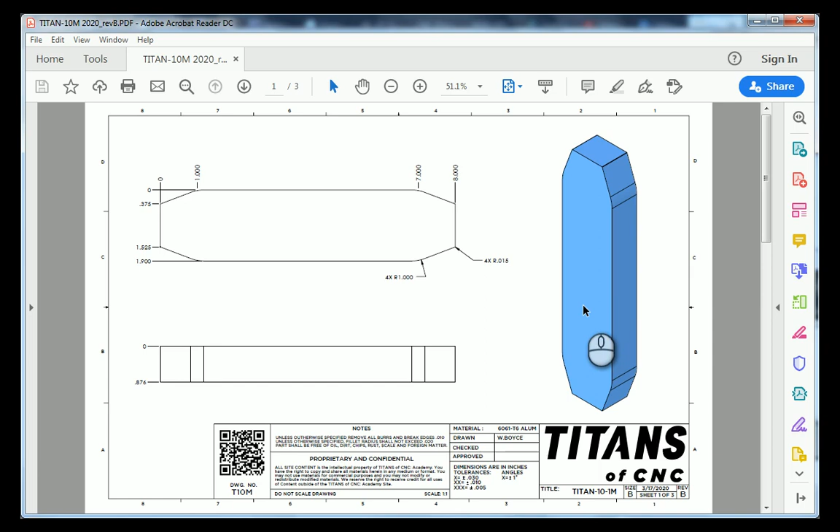On sheet number 1, we have the outside geometry of our part, and we also have some radii. Sheet number 2, we've got these bosses and their locations. Sheet number 3, we've got these counterbore holes, tapped holes, and polygons, which make up the features of our honeycombs.

Looking at our front view here, we have a cutaway, and we are ready to go. Let's jump into Fusion 360 and create our drawing.

I'm over here in Fusion 360 now, and I already have the Titan 10M loaded. The very first thing that we need to do is create some reference geometry that we can import into our drawing workspace.

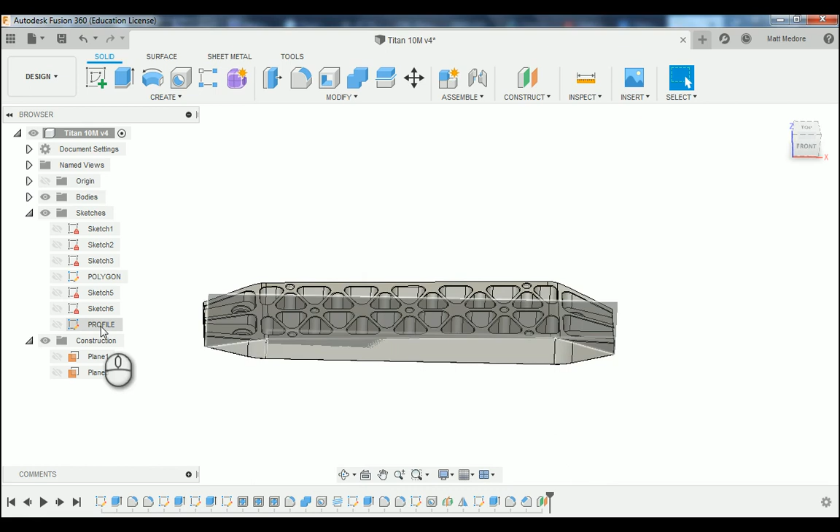As you can see in my sketches, I've changed some of the names so I can better find them. The two sketches we are going to be looking for are the profile sketch that cuts our part away, and our polygon sketch, which creates that honeycomb feature.

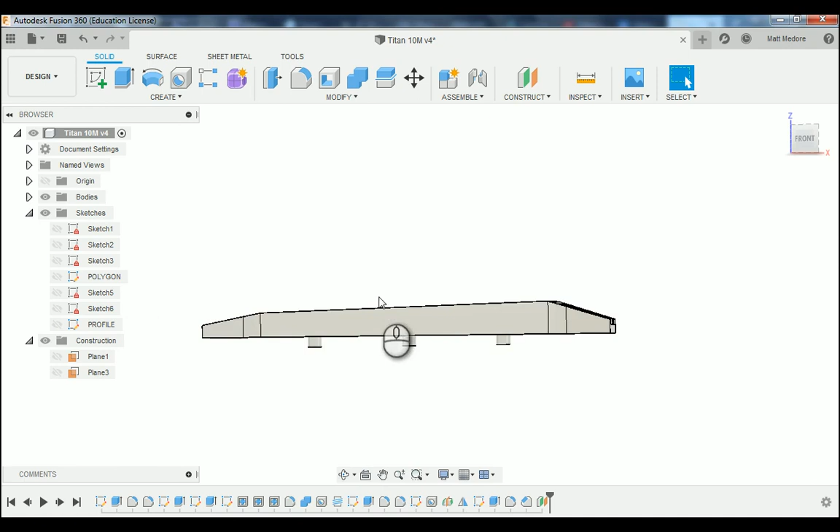We're going to create two new sketches though, because I don't want all that geometry, just a portion of it. So I'm going to go to Create and down to Create Sketch, and click on the front part here.

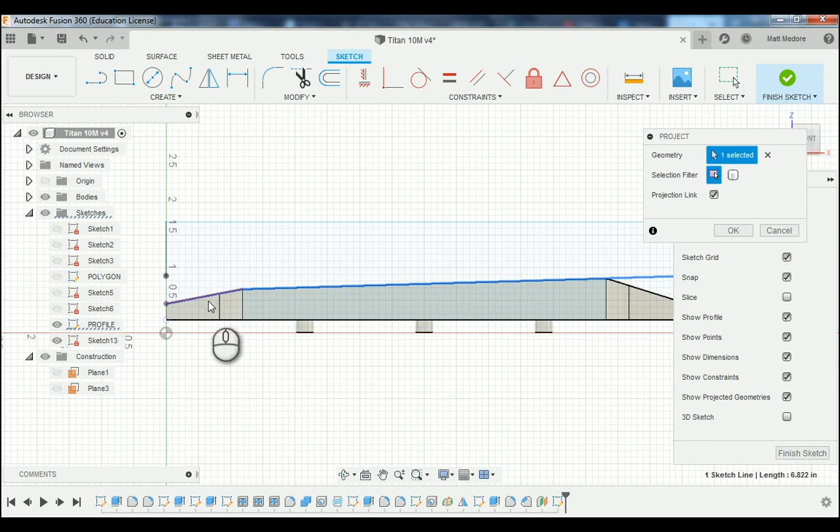I'm going to come over to my sketches and turn on my profile sketch, and I'm going to project, so P on the keyboard, some geometry. The geometry I'm going to project is this line right here, and this vertical line, and then press OK.

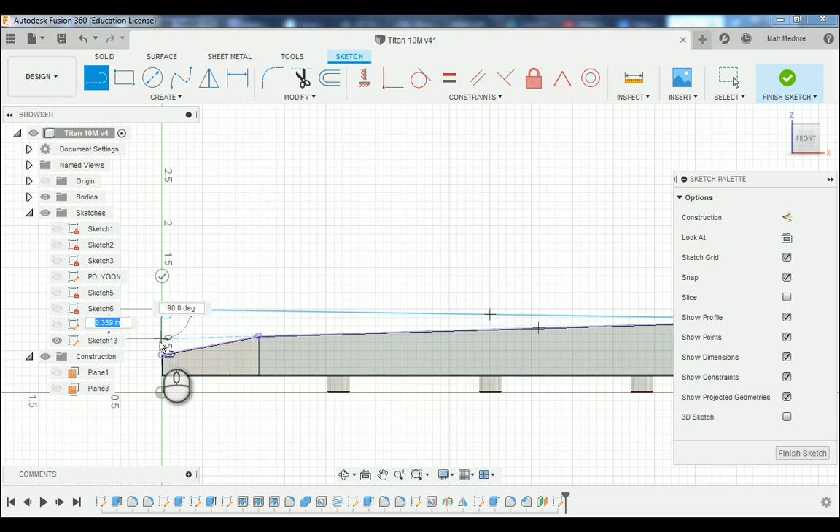Once you have that geometry in place, we're going to turn off our profile sketch. What we're going to do is create some new lines in here, L on the keyboard. We're going to draw a line in. This line, we want it to go all the way across the part, and then terminate into this endpoint.

We want to add a relationship to this line. We want to say it's perfectly horizontal, so we're going to add in that horizontal constraint, just like that.

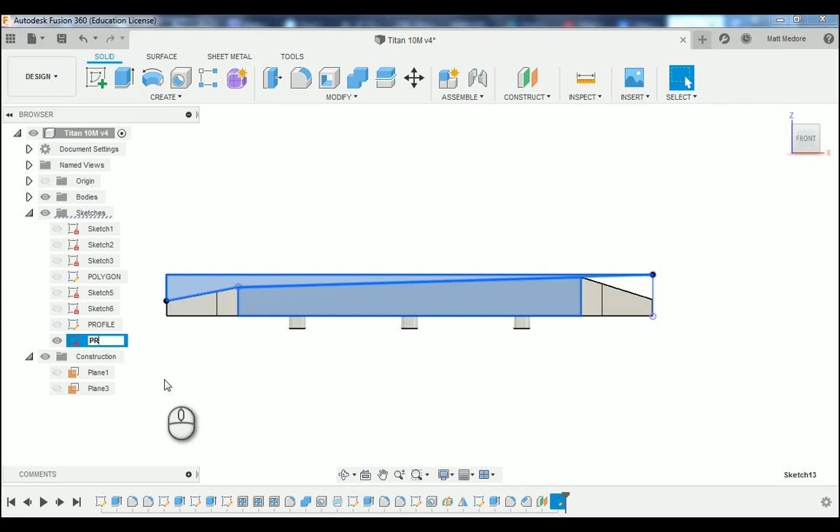We're going to finish our sketch here. Then I'm going to rename this sketch by slowly double clicking on sketch 13, and I'm going to label this as profile drawing, then enter to lock it in. I'm going to turn the visibility of it off so I can work on my next sketch.

My next sketch, I'm going to have to create a construction plane on because the top of our part here is cut away at an angle. So I'm going to go to Construct, down to Offset Plane.

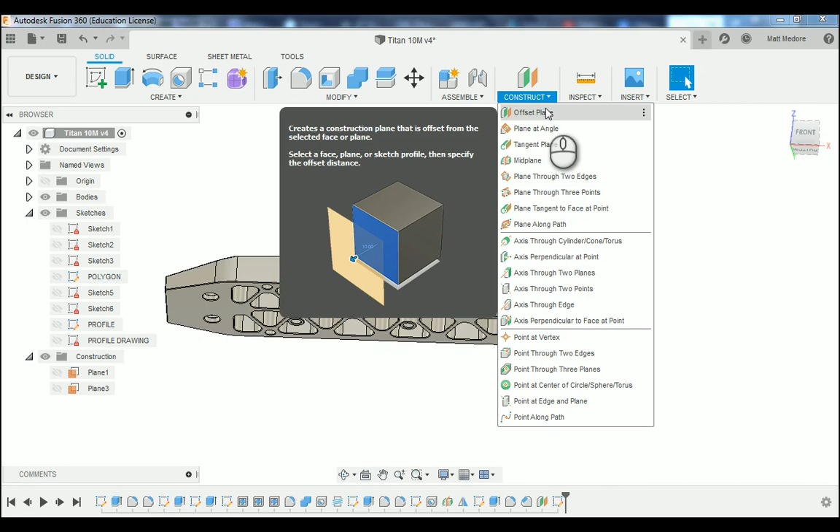I'm going to click on the very bottom of my bosses, and then I'm going to type in a measurement of -876 thousandths, which is the top of our part, and then press Enter.

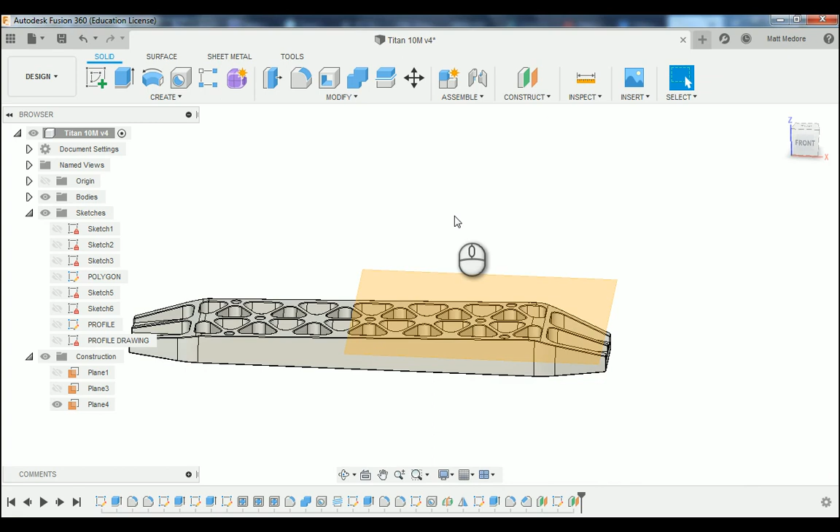Now that I have a construction plane here, I can create a new sketch. So P on the keyboard for project. We're going to click on this sketch here, and then we're going to turn our polygon sketches on.

The geometry I'm after in this sketch is going to be the geometry that makes up this polygon, including the cross lines. So I'm just clicking on those lines here, but I'm not clicking on the center line because that center line goes all the way through the part. Notice if I turn my body off, this is the geometry I have chosen.

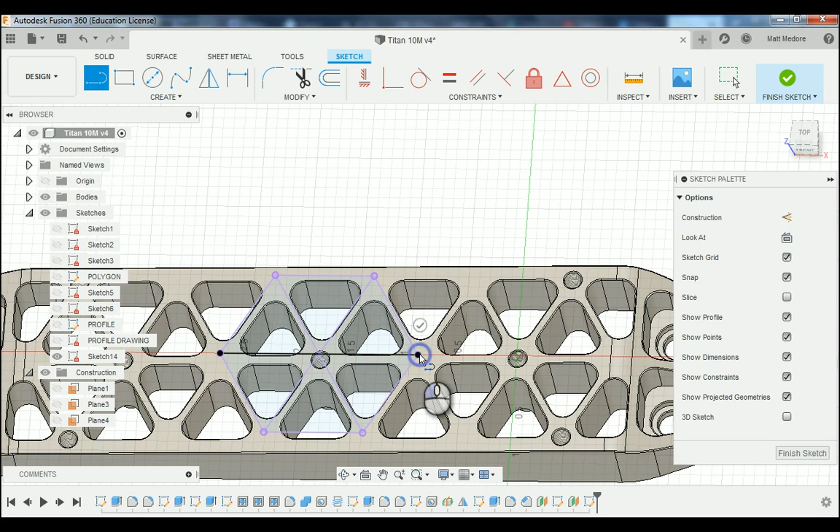Afterwards, I'm going to press OK in the pop-up window, and then I'm going to turn off my polygon sketch. I'm going to add in that missing center line and finish my sketch.

I'm going to label this sketch as polygon drawing. That way I can reference it in our drawing workspace.

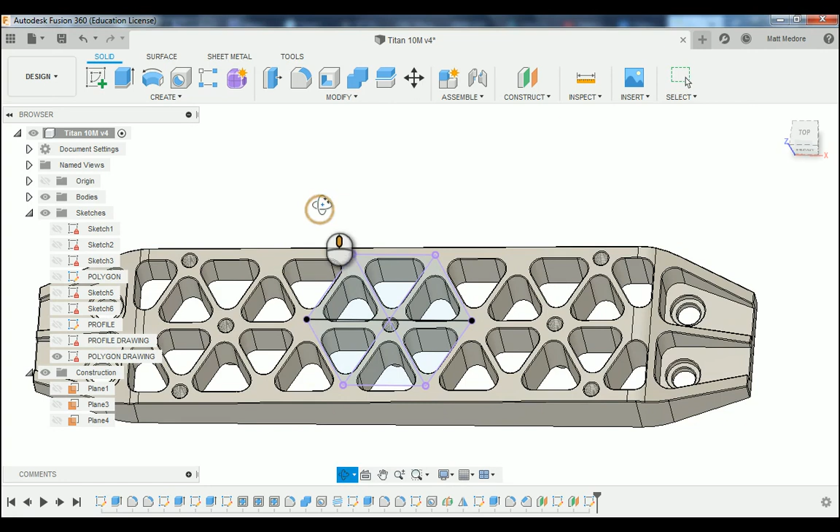We're ready to move into our drawing workspace. First thing you have to do is save your part, and then we're ready to change our workspace, going down to drawing from design.

In our pop-up window, it's asking, do you want everything in the modeling workspace to be a part of your drawing? Yes, we do. We are creating a new drawing. The template that we're going to be using is a template that we created in another video, and then we're going to press OK.

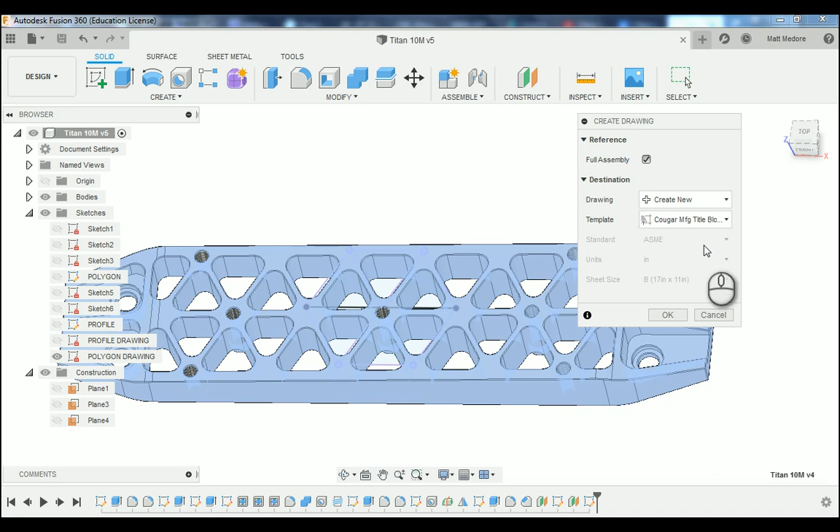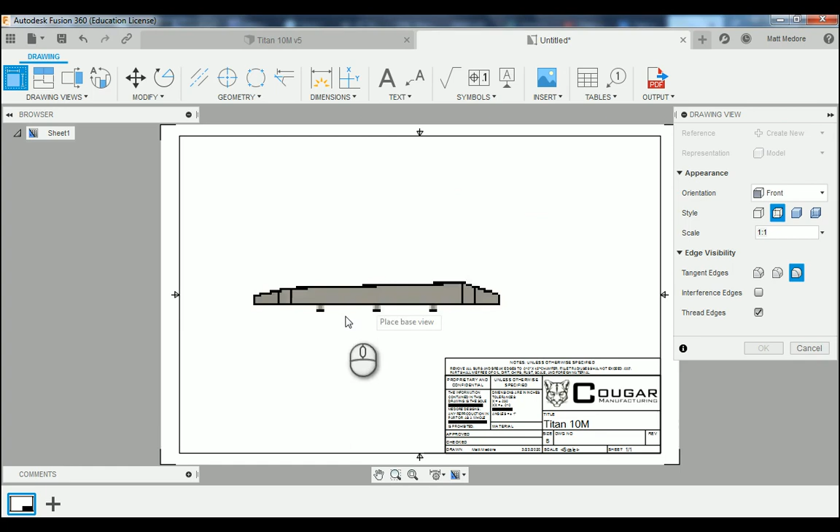The very first view that we're going to be landing is our front view. If you look at our view, our scale is very small, so I'm going to change our scale to 1:1, which will make it a lot easier to see. I'm going to land our front view right about here, and then press OK.

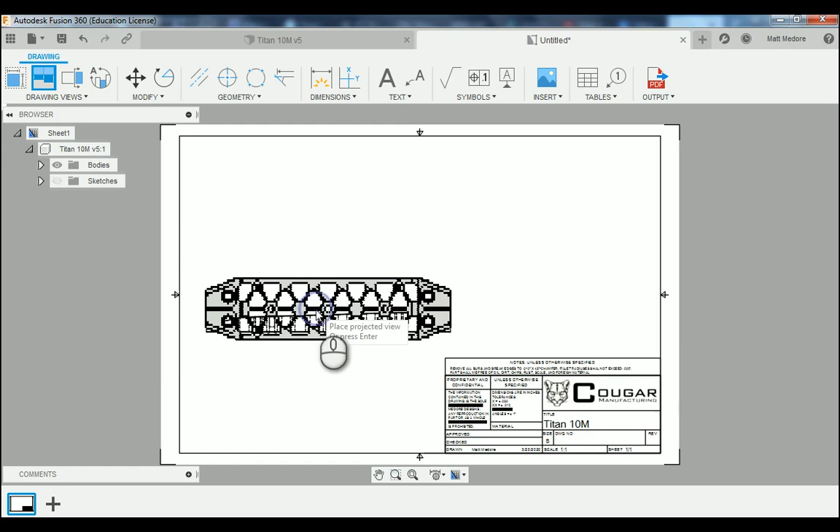Now that we have our front view in place, we're going to add in our top view, going up to our toolbar and to projected view. We're going to click on our front view here, dragging up our top view, and then I'm going to move my mouse to the side, giving us an isometric view, and then press enter on the keyboard to lock into place.

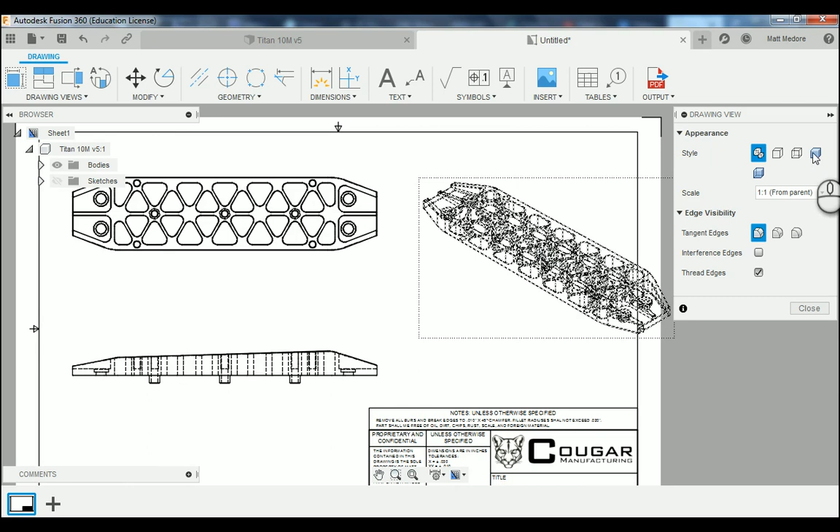I'm going to change our isometric view from a wireframe into a shaded part, so I'm going to go shaded with visible edges, and then I'm going to close that out.

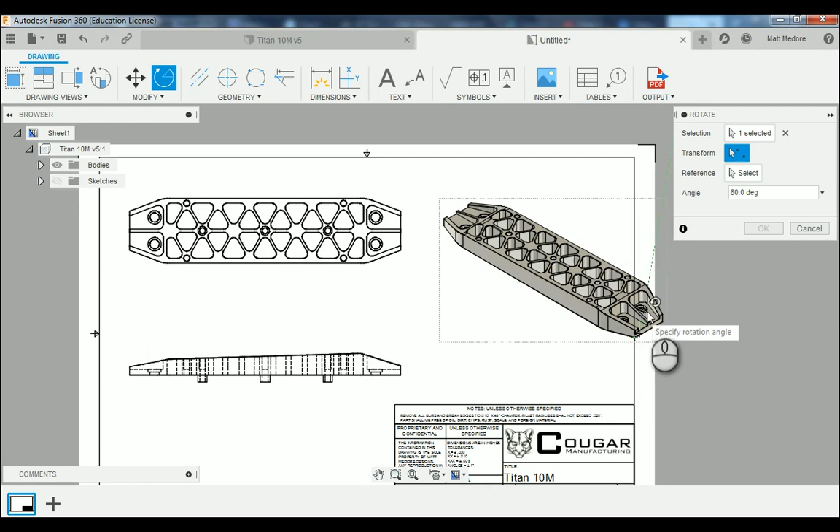I'm going to rotate our isometric view around so I can better fit it into our sheet here. I'm going to go to modify, down to rotate, click on this, and then go up to transform and choose a location. I'm going to drag my mouse around. You have to be kind of patient with this—Fusion 360 is trying to come up with this like a wireframe preview for you. And that's looking pretty good. Then press OK.

I'm going to move my isometric view down and onto our sheet.

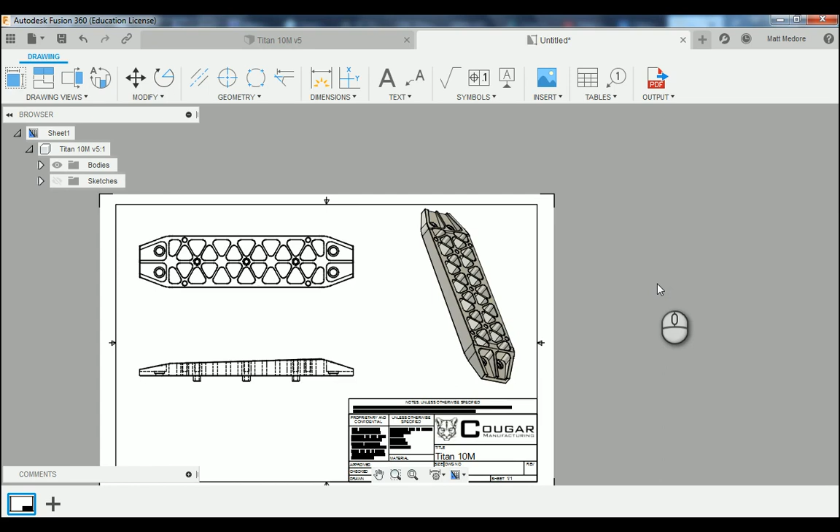Now that we have our 3 views present, we're going to come over to our browser window and open up our sketches. We're going to turn the primary visibility of sketches on, and then turn on the visibility of our profile and our polygon drawing sketches. As soon as Fusion 360 updates, our sketches that we created before we left our design workspace are now visible.

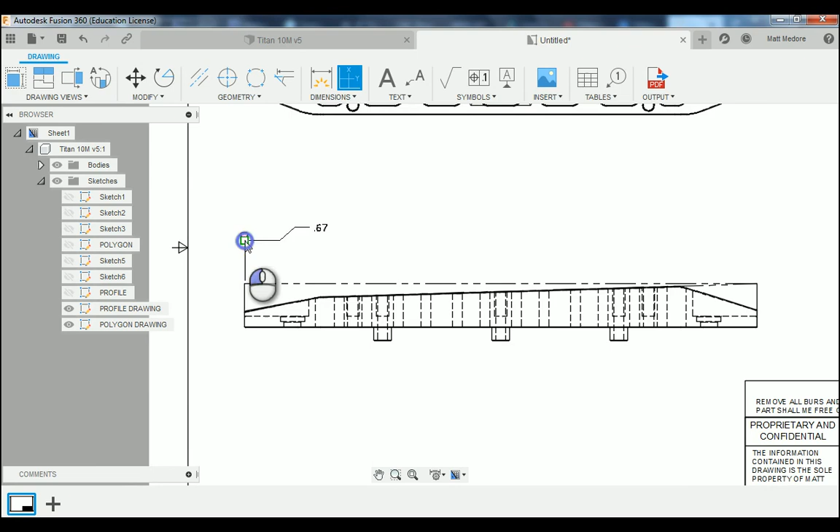We're going to take a look at our front view first. We're going to come up to dimensions and down to ordinate dimensions. We're going to land our datum location right on the top of our sketch that we created. We're going to land our 0 here, and then our 0 at this location.

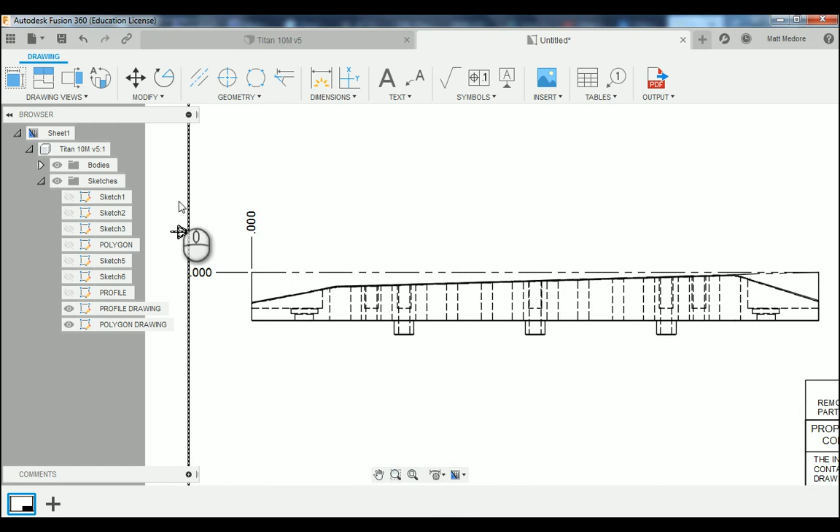I'm going to drag this down a little bit to kind of even them up. One thing I am going to change: I'm going to go down to the bottom center where it says annotation settings. I'm going to turn on display trailing zeros, and then change my linear dimension precision to the thousandths column. Notice my 0 location has the 3 trailing zeros here, so I'm going to double click on it and change its primary precision to read just 0.

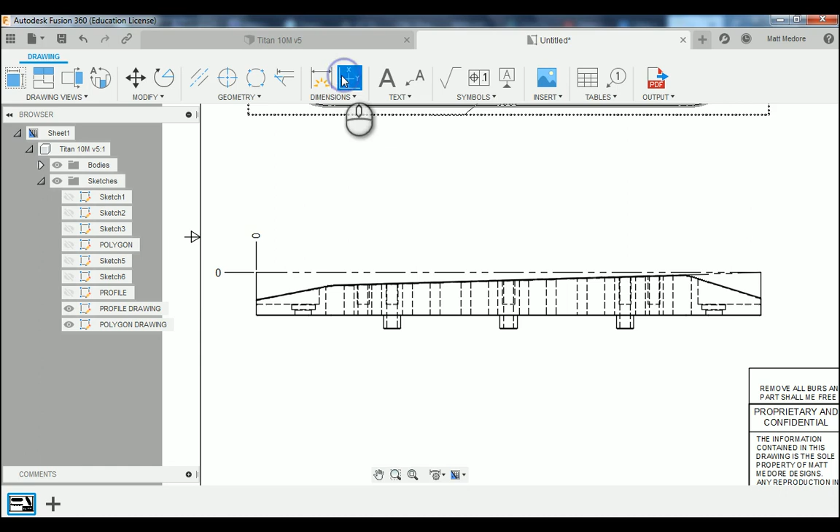Now that we have our datum landed, we're going to add in some of our measurements. We're going back to ordinate dimensions, and we're going to take a look at our vertical measurements first. I'm going to zoom in—we have our sketch that we created before we left the design workspace—and I'm going to reference off of the tip of those intersections and drag my mouse over.

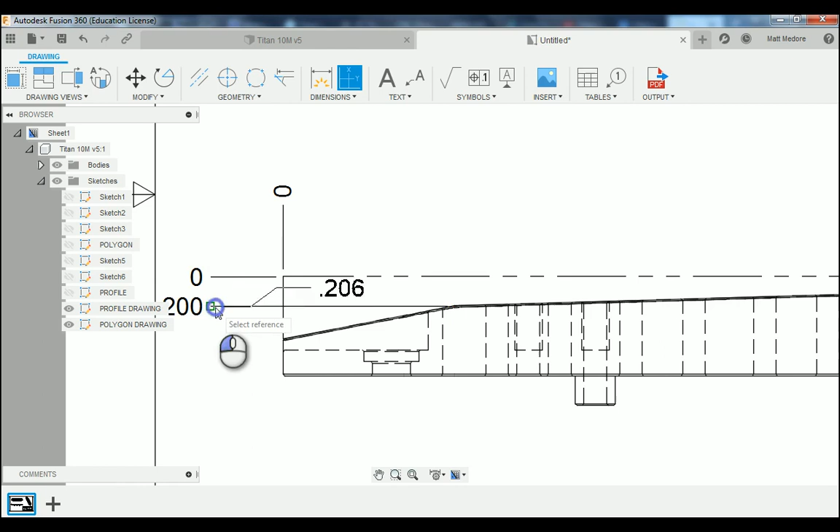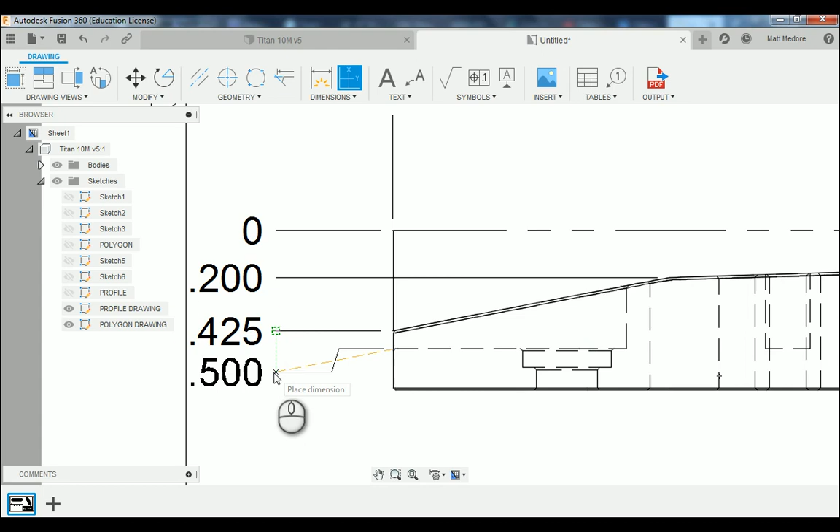Then I'm going to zoom in here, and reference off of this tip here, which is the outside of our part. Be mindful you're not clicking on where the chamfer was located. I'm going to go off of the bottom of our pocket, again referencing off of the end of our extension lines, and then the bottom of our part. And then lastly, the bottom of our bosses.

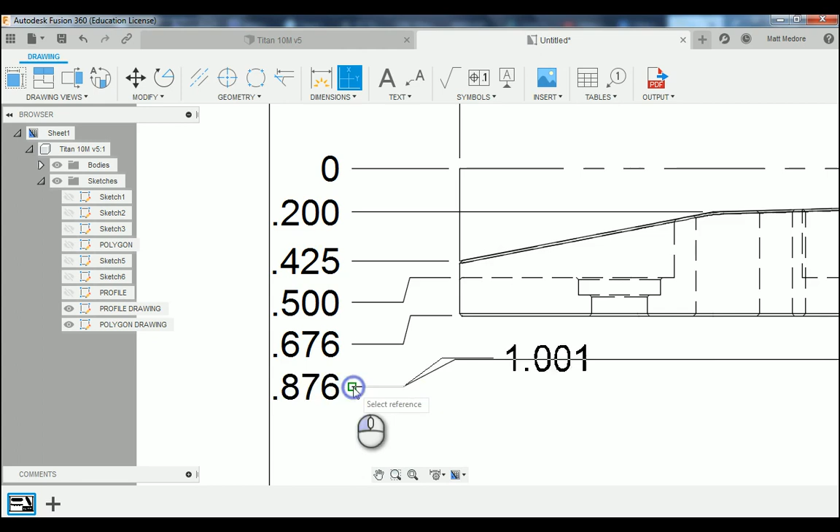Now that we have those dimensions in, we're going to add in our horizontal dimensions. Same thing, we're going to reference back to that intersection point, referencing off of our extension lines. Then we're going to come over to this area, and same thing, we're going to reference off of this theoretical location.

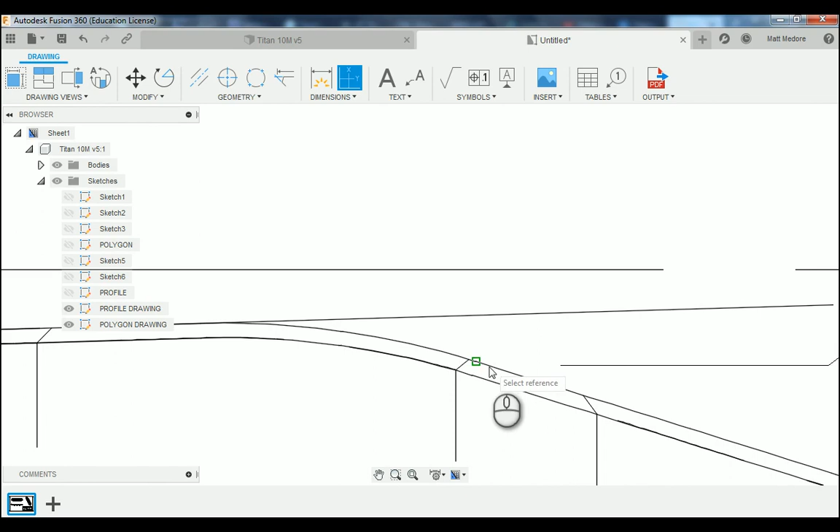Unfortunately, we don't have a line here, so what we're going to do is find the endpoints of the arc here, and then move our mouse here—you can see we have those green lines that form that intersection point. I'm going to click on it.

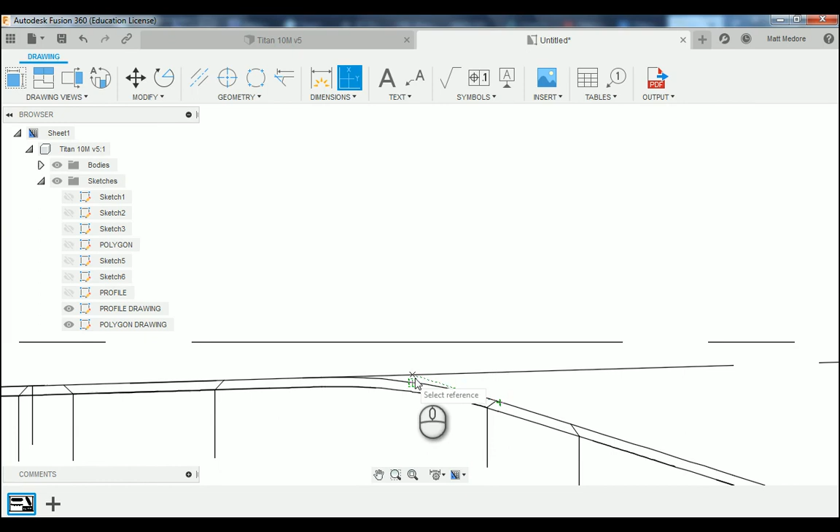And then again referencing off of our last extension line—looks like we got a small error. If you're coming up with an error, make sure you address those. Generally, Fusion 360 is correct on all these errors. So let's come in, let's find that arc again. There we go, that's better.

And then lastly, we're going to come off of the end of our part, and I'm going to put a little bit of a bend in this one. I'm going to adjust this one and put a bend in here too.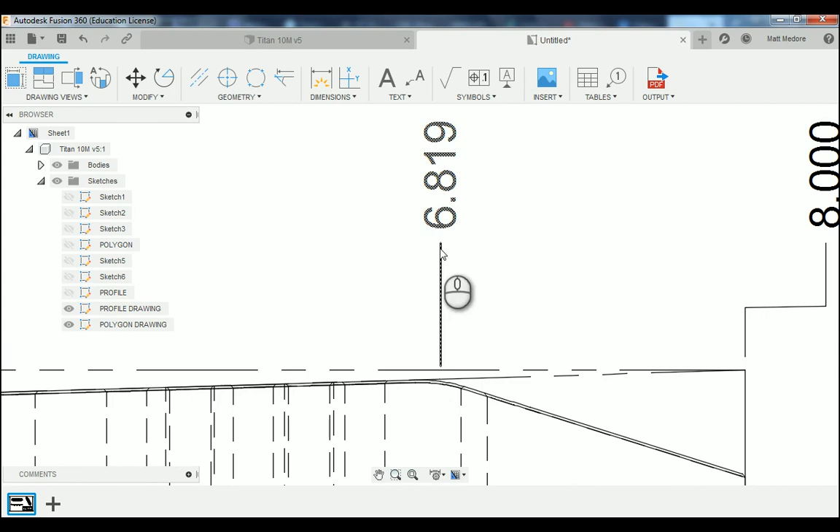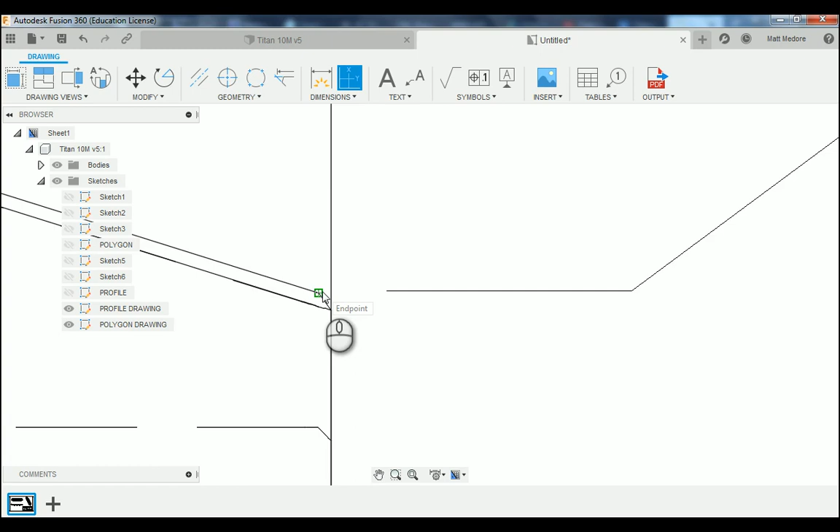We do have another measurement coming off of this side. Now I could reference it on the other side, but the issue is our extension line would pass all the way through our part, which could be harder to read. So I'm going to go back to ordinate dimensions and reference off of that—oh, sorry, wrong one—off of this tip of where the cutaway was, coming right off of the front line, and we'll drop this down like so.

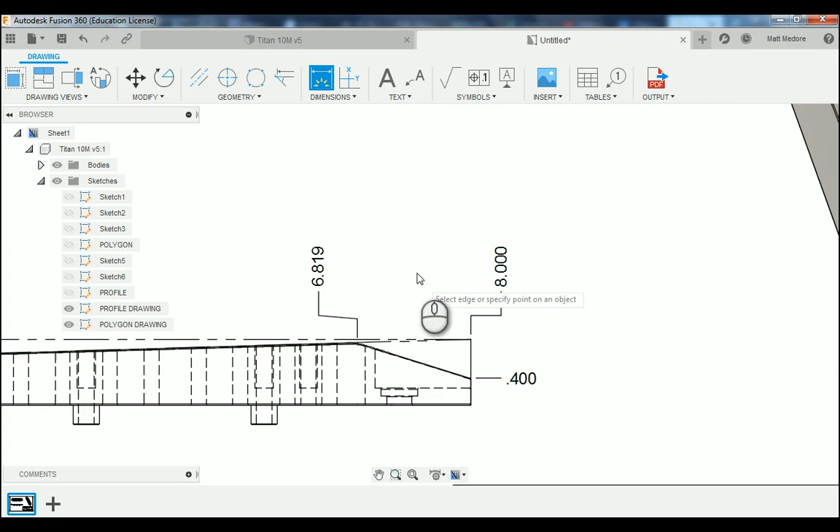Now that we have our dimensions in place, we're going to add a couple other dimensions. We're going to go to D on the keyboard. The one dimension we're going to add here is this radius. I'm going to click on it and drag my mouse up.

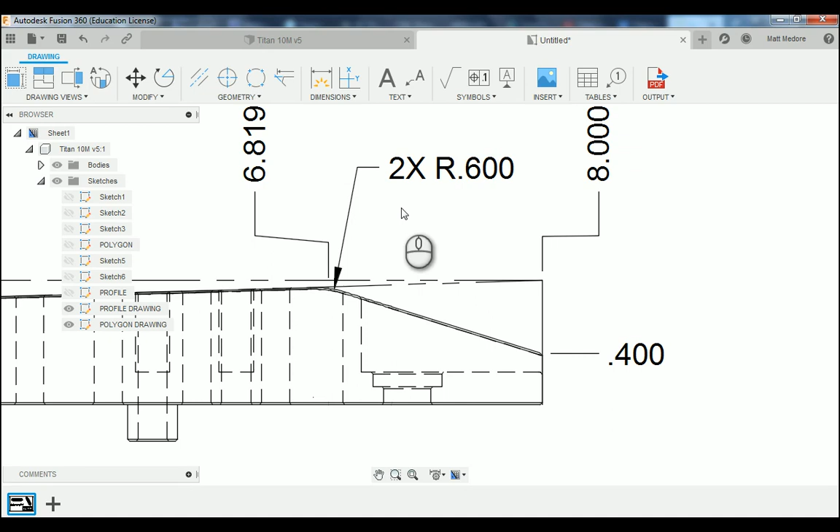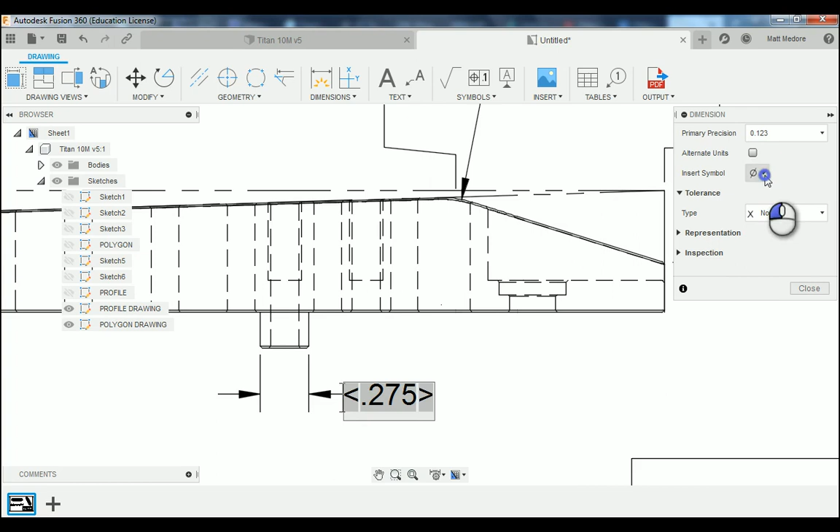Then press OK. There are two features that share that radius, so I'm going to type in 2x. In addition to that, we have the diameter of our boss. So we're going to go back to dimensions, or D on the keyboard, and draw down the diameter of my boss. I'm going to double click on this and insert the diameter symbol so you realize that that is a circle. And then I'm also going to put the indicator in there that there are 3 that share that dimension.

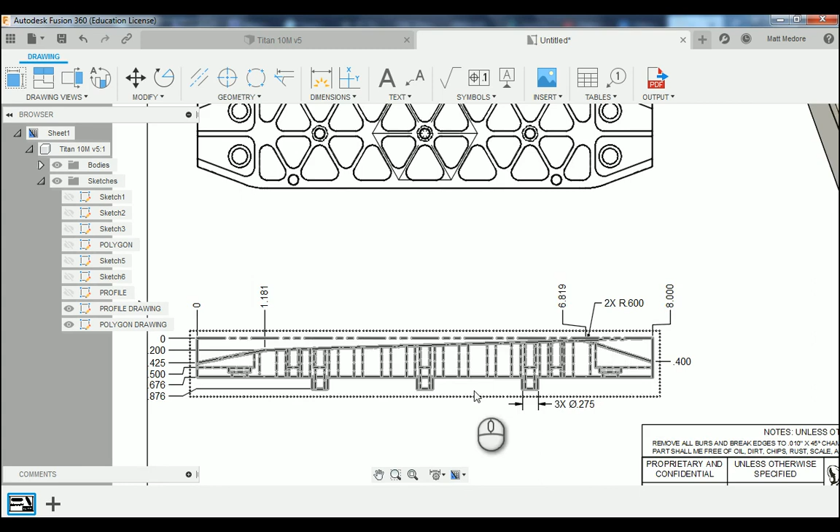Looks like our front view is pretty much done. The only thing I dislike right now is my measurements are really close to the edge. I'm going to click on my front view and just nudge that over a little bit.

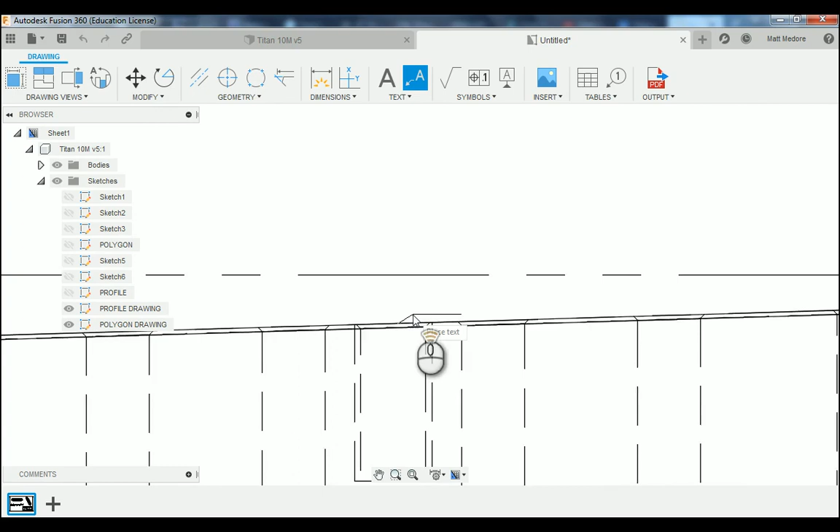The only other thing we're missing out of this is we need to call out our hole locations. I'm going to go to text with the leader, and I'm going to click on this area here, kind of in the center where our holes are. And I'm going to type this note in: there are 7, 1032 unified fine class 2B threads.

We want these to go down 500 thousandths minimum. We'll insert the GD&T symbol for depth. And then our hole, I'm going to type hole in, has a diameter. We're going to insert the diameter symbol, and that is 177 2/10. And that needs to go through the part. And we'll close that out.

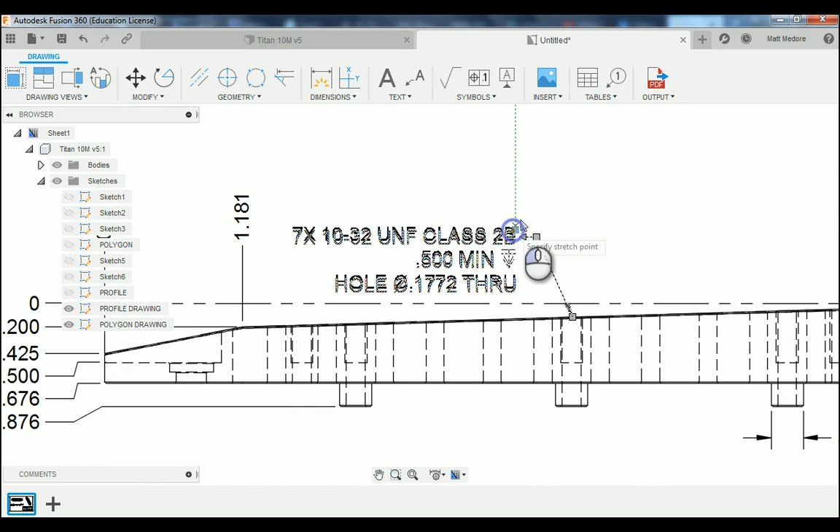After you type your note in, we can move this around and kind of reorganize the workspace. Our front view is done now. What we're going to do is come up and start dimensioning our top view.

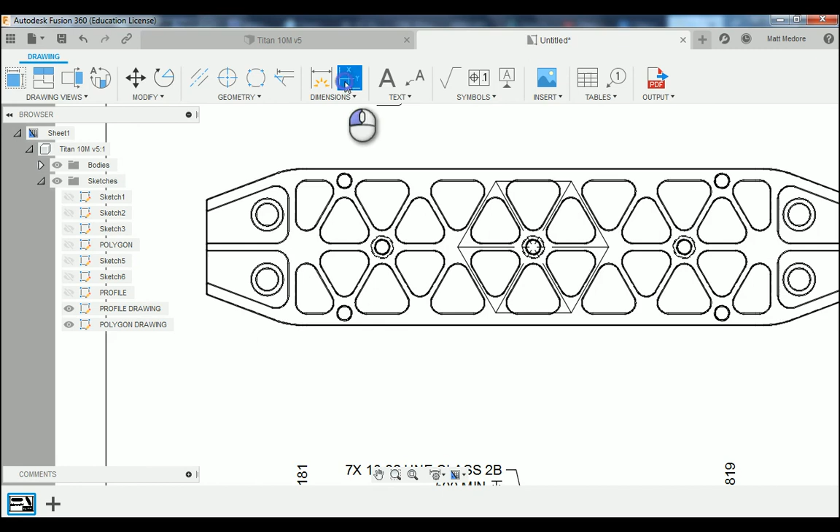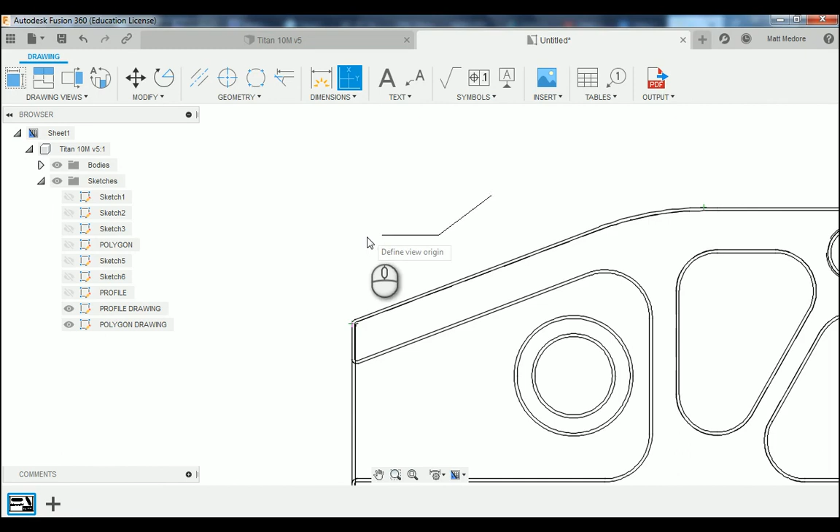We're going to go back to ordinate dimension. We're going to reference off of the endpoint of our arc here, and then the front of our part. Let's zoom in there a little bit better. And then we're going to find the intersection point there. Okay, we have our datum landed.

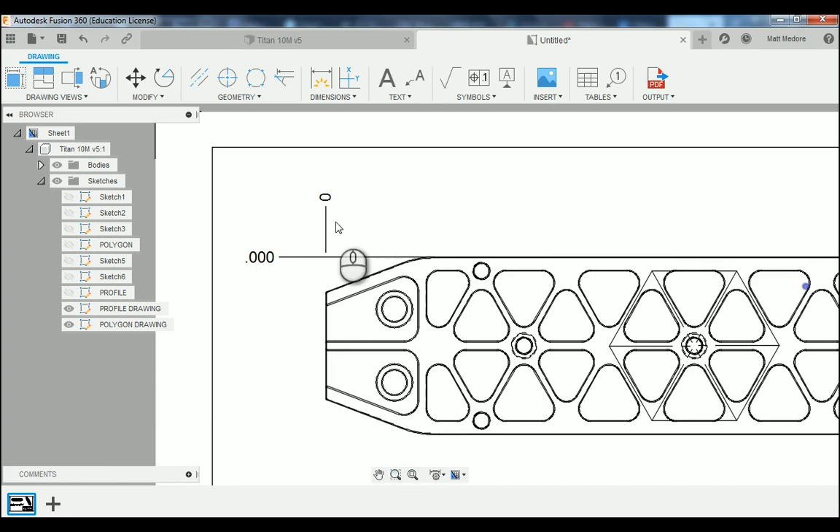Now we're going to come back and add in our other measurements. What we can do is come in and reference off of the extension lines here, that way everything lines up exactly. I'm going to change the primary precision of these to 0, and we're ready to add in our ordinate dimensions.

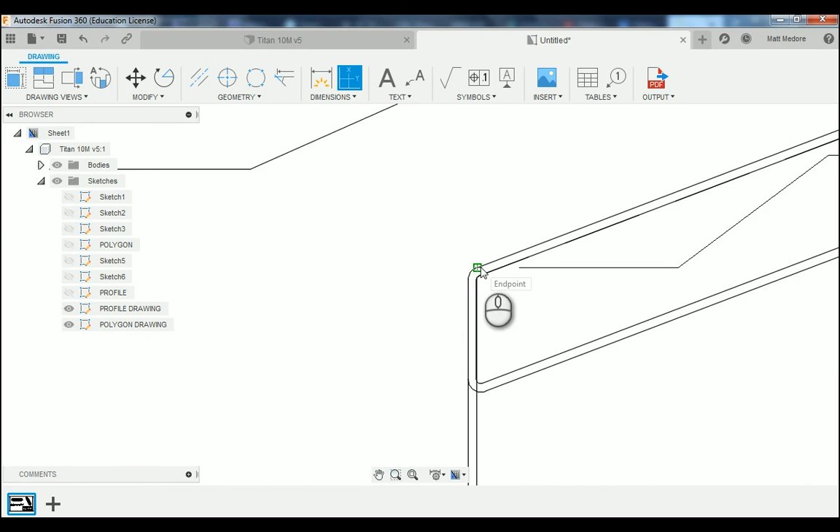The very first dimension we're going to reference off of is the center of this bolt hole. We're going to add that in. The next dimension is this theoretical point here off of our arc. May have to zoom in a little bit more. There's our theoretical point. Moving off of that.

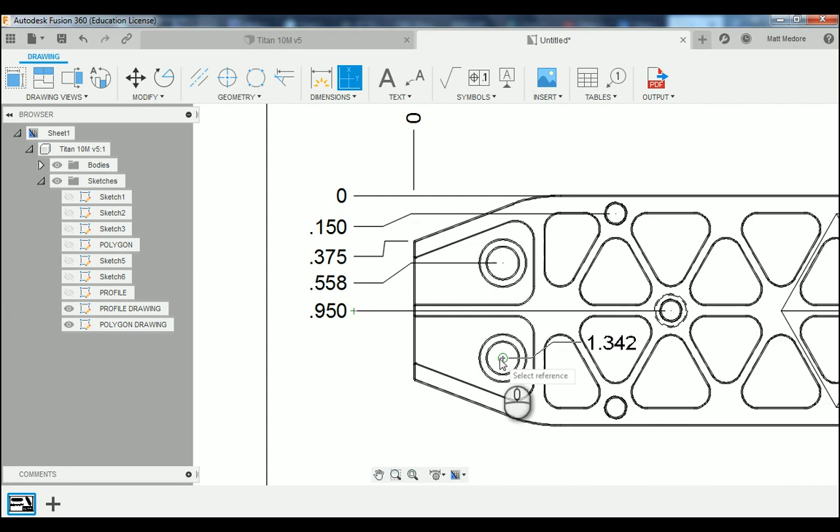The center of this hole—this is our counterbore hole. The center of our holes running down the center. Center again of the counterbore hole. And this theoretical point here from this arc.

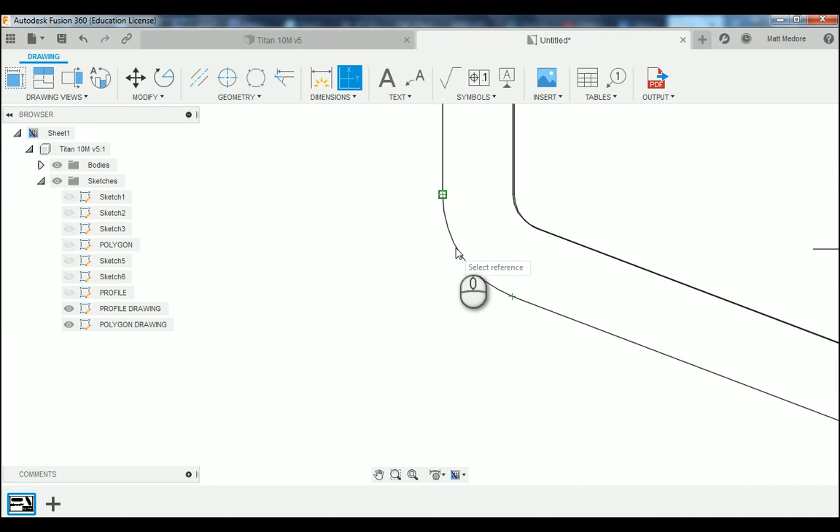We may have to zoom in a little bit more. There's our point. The hole's going across the bottom, and then the bottom of our part.

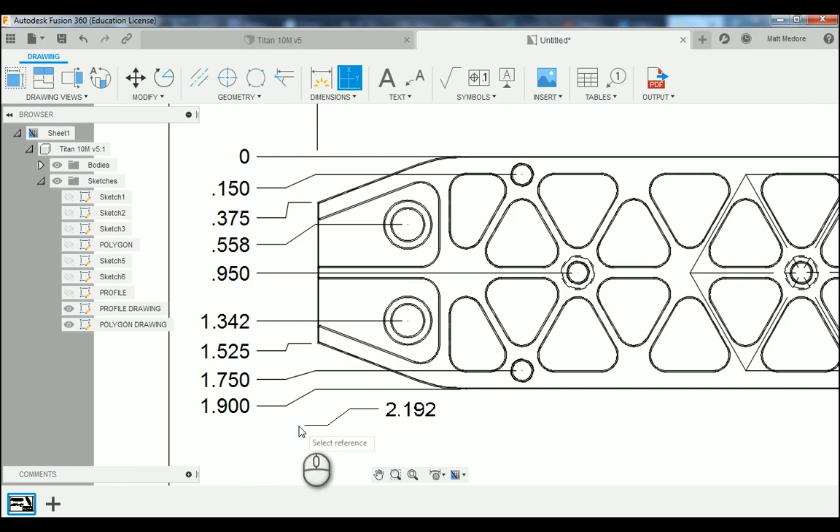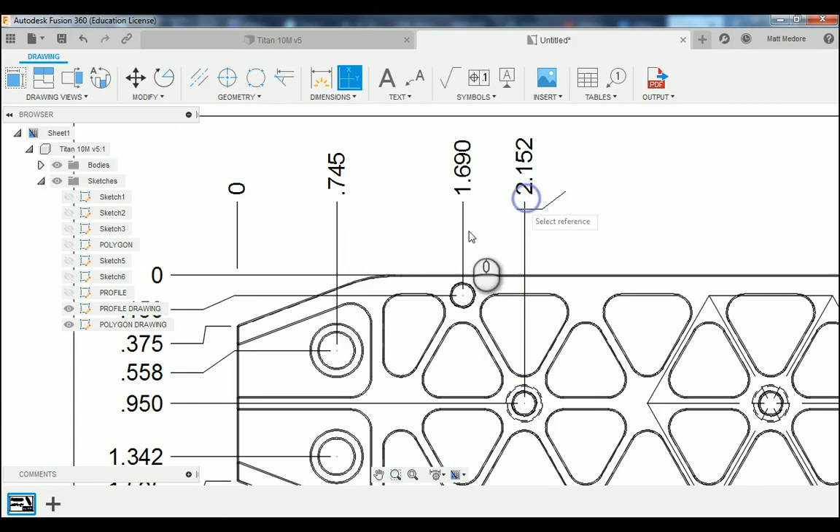Now that we have our vertical dimensions labeled, we're going to come in and add our horizontal dimensions. First, coming off our bolt hole here. Then we're going to come off of these bolt holes. Again, I'm referencing off of the previous extension line, so everything lines up on our print.

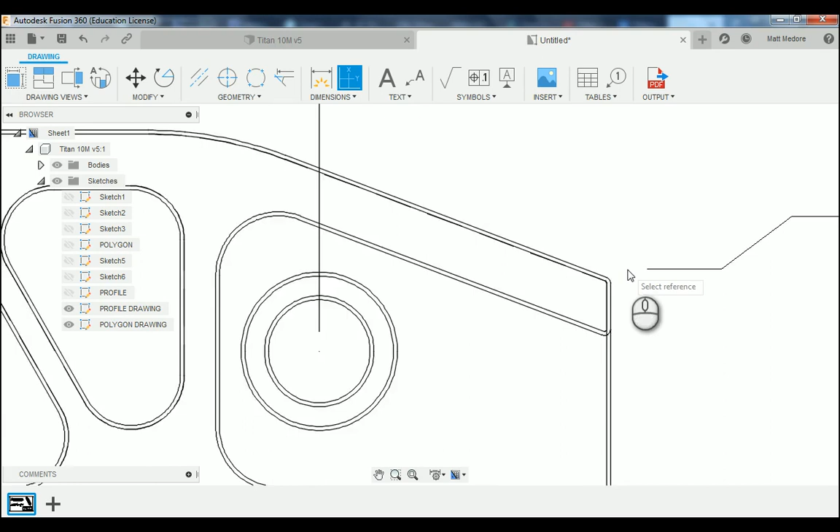Once you get accustomed to Fusion, you can actually knock out a blueprint fairly quick. You just have to understand kind of its little nuances there.

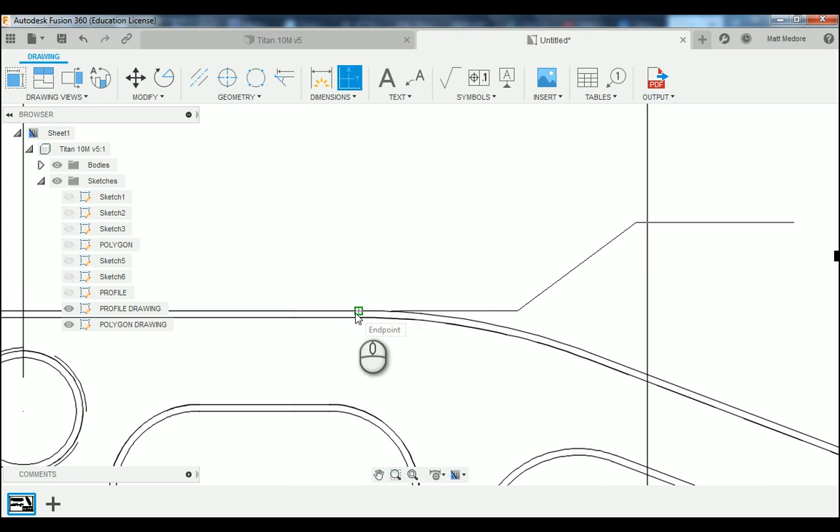Now that we have our linear dimensions in, we're missing two horizontal measurements. The horizontal measurement we're missing is this theoretical point here. We may be able to capture it right now off the arc. So there's our one point here.

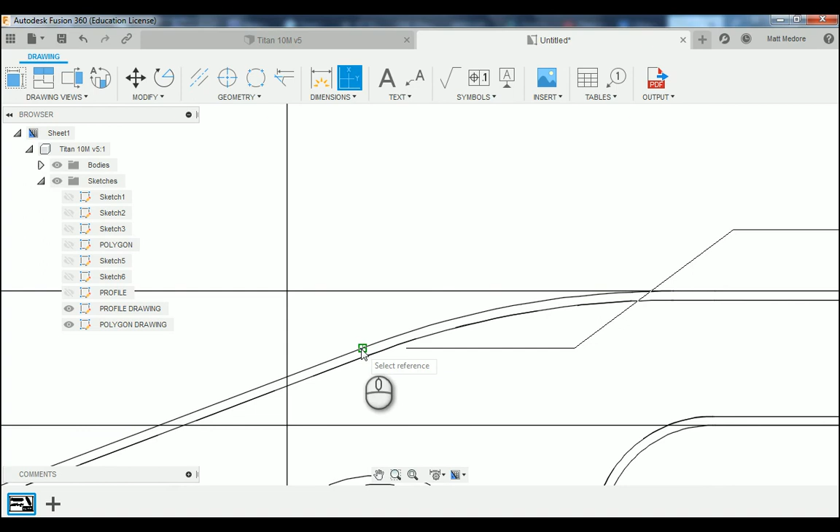And then we're going to locate this one the same exact way. We're going to zoom really far in. We're going to find the endpoints of our arc. And we have this endpoint here.

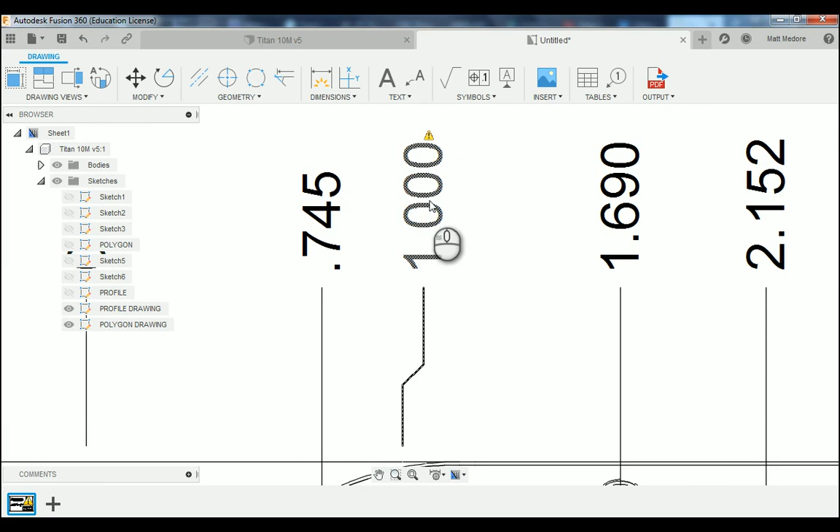If you are coming up with any type of errors, I highly suggest addressing those. Notice we're getting a little bit of an error here. Fusion 360 is actually pretty accurate if you misclick some geometry, so let's go back and try to fix that geometry here. Here's my endpoint, here's my radius.

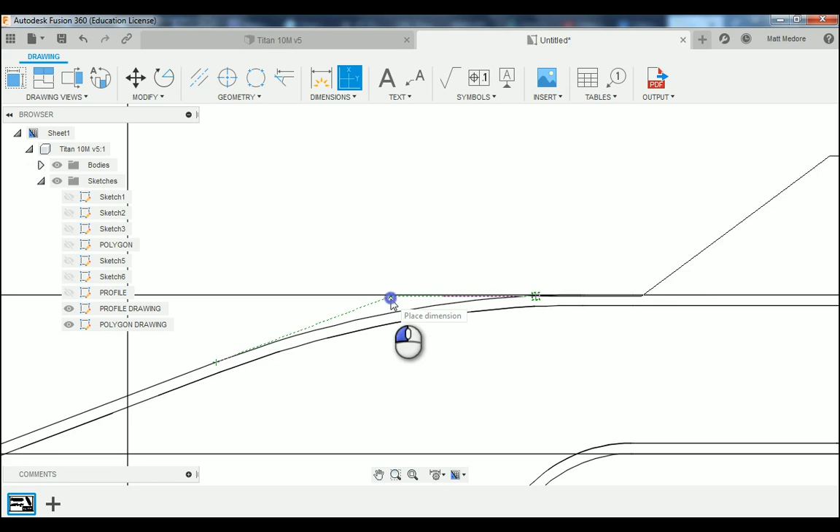And I think we're still too far off. My endpoint. And my other endpoint.

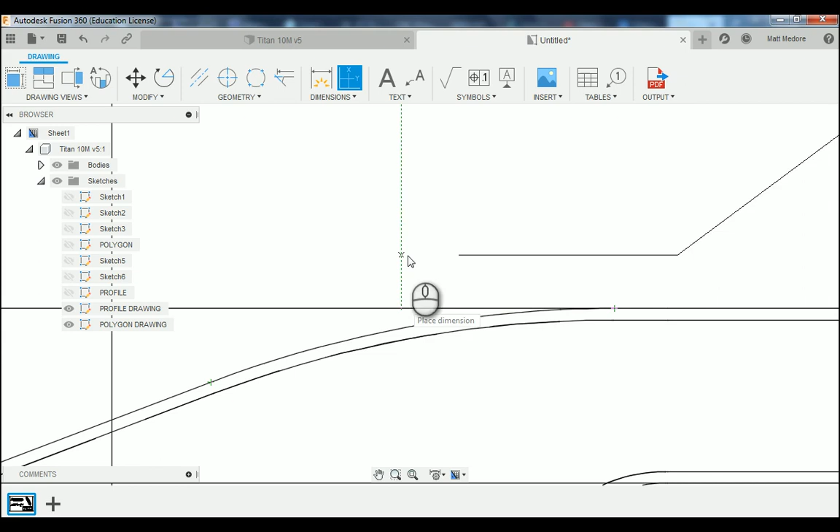And this one we're having a little bit of an issue with. That's okay. If you are having an issue with landing something like this, you can always go in and add some geometry that will help locate that for you. Let's try this location and see if this works.

Notice we're still getting that warning. So what we're going to do is delete this one. We're going to add in an edge extension. We're going to click on this line here and this line here, and that will give us a location to snap to. And now we have no warning.

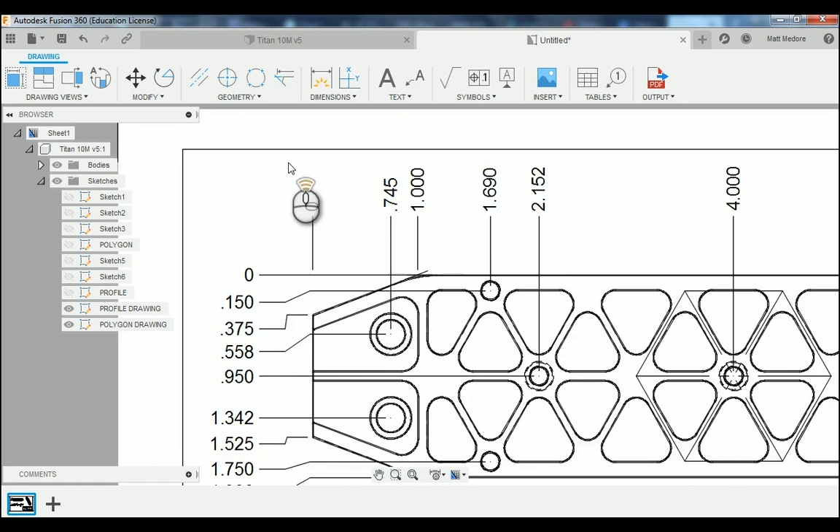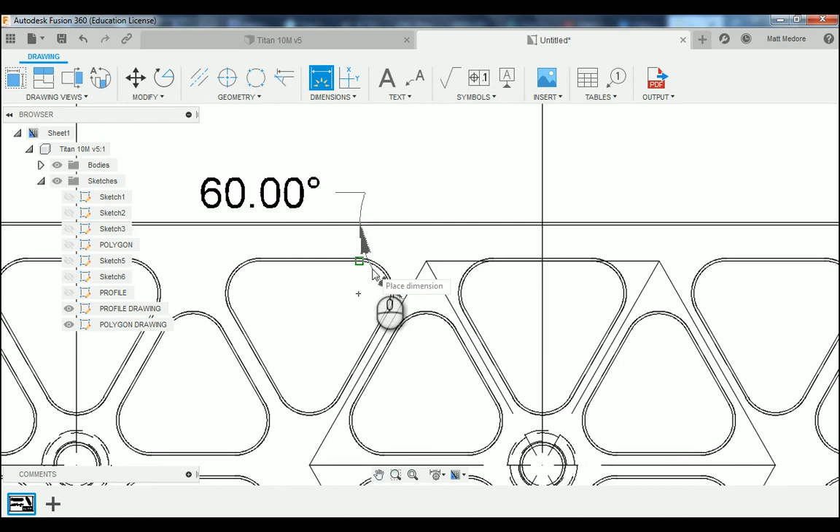Now that we have our horizontal measurements in, we're going to add in some of our other dimensions. D on the keyboard enters us into dimension mode. I'm going to reference off of this polygon here, click on the edge of our polygon and then the edge of our part, drag my mouse in between these lines, and then land that measurement there.

While I'm here, I'm going to add in this radius here. I'm going to drag my mouse over, adding in our radius.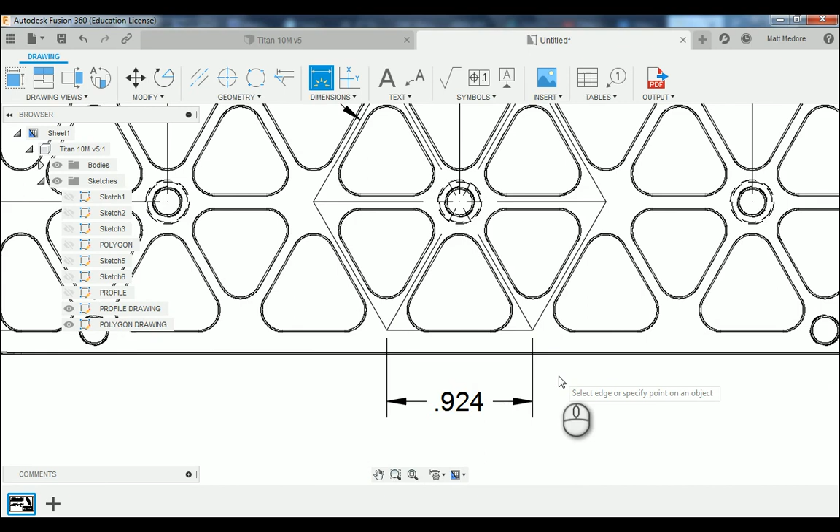The bottom of our polygon, we're going to go from point to point. The web over here, we're going to click on both sides of the web, drag our measurement down. This one I'm going to readjust and bring my leader line onto the other side.

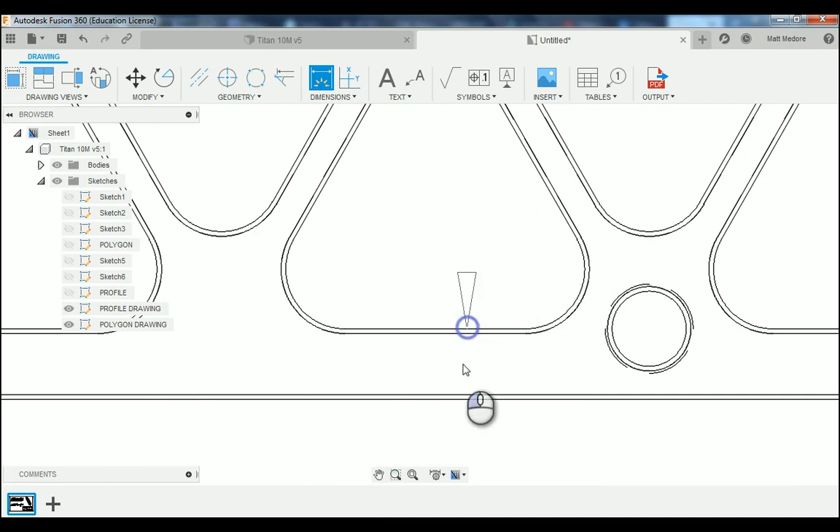We have another web thickness. I'm going to click on this triangle over here and position that pretty much in the center.

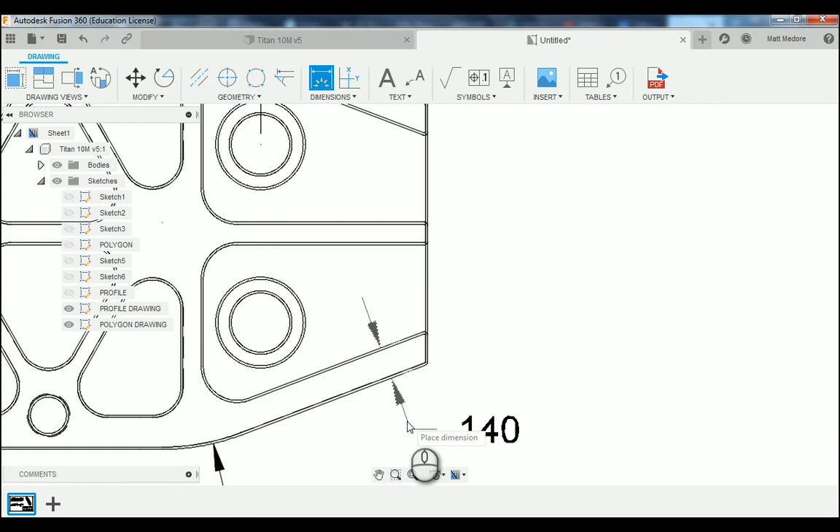We have a radius on the outside. We have this web thickness here. And then we have this web thickness. And then lastly, we're going to come off that radius there and add that in.

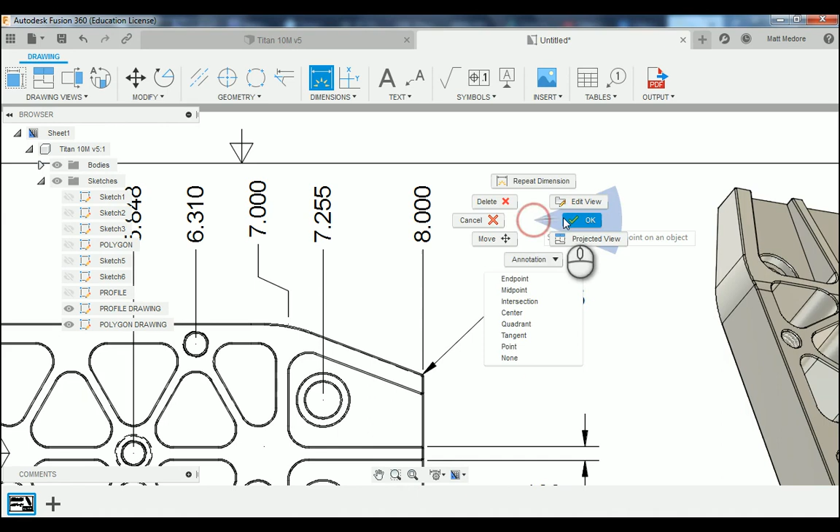Once I got my measurements in place, all I'm going to do is come back into them and type in the quantities. There are 12 features that share this particular radius.

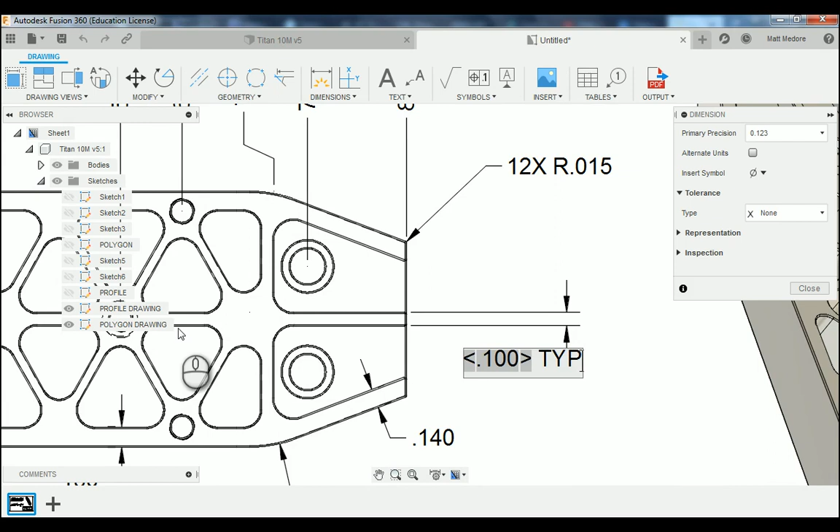On this web thickness, that entire web going down the center of our part is all the same thing. So I'm going to type in TYP at the end, indicating the whole web is typical.

Our dimension down here of 140 thousandths for this web thickness, there are 4 instances of that, so I'm going to put a 4x in there. The radius here, there are 4 instances of that radius. I'm going to close that out.

This dimension of our web here on the bottom of our part, there are 2 of those features on here. So we're going to type in a 2x here and then close that out.

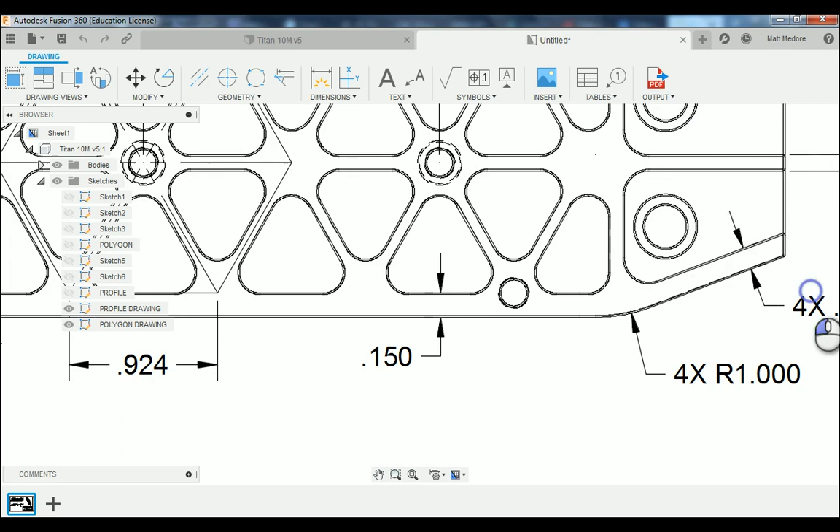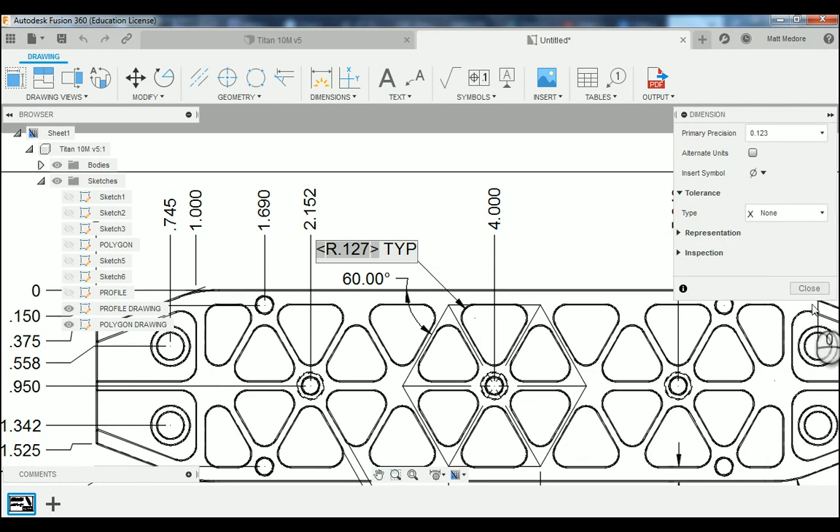And then I'm going to change this 80 thousandths to typical, meaning that the webs for that polygon are all 80 thousandths. Going back to our radius up top, I'm going to add a typical in there. And I'll realign this.

And we're getting pretty close to the end. We're going to add in some geometry here. We're going to add in some center marks on our counterbore holes. We could also add these center marks on our drilled and tapped holes, but it's not really necessary.

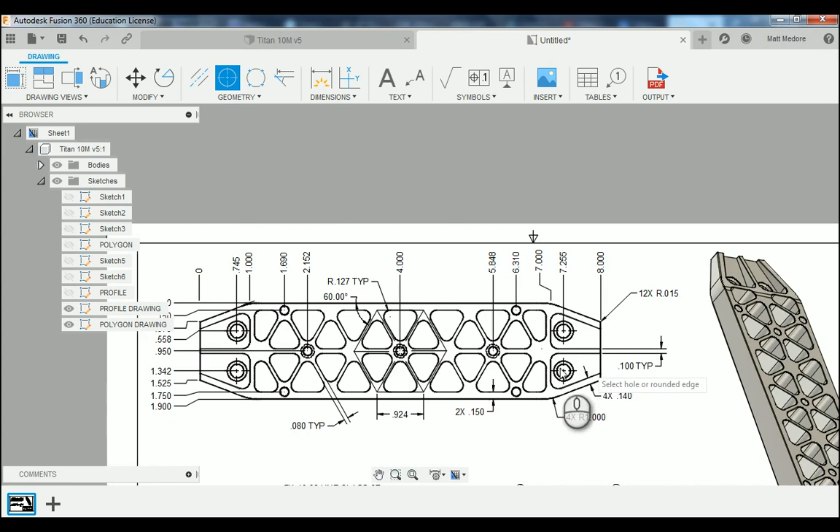Lastly, we're going to add in a text with a leader. We're going to reference off the center mark over here. Actually, we'll reference off the hole. We're going to drag a text box down.

And we're going to type in our counterbore hole dimensions now. There are 4 counterbore holes, so I'm going to type in 4x. They all have a diameter, so I'm going to type in the diameter symbol, then the counterbore symbol, then the diameter symbol, and they all have a diameter of 380 thousandths.

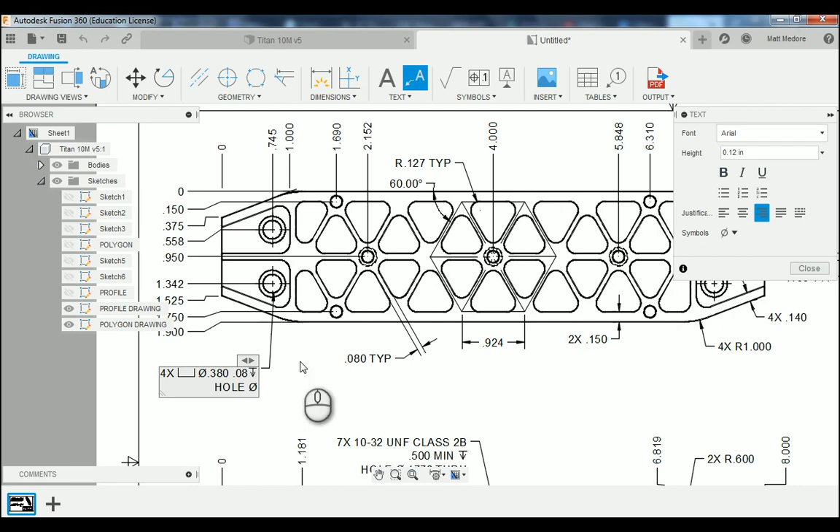With an 80 thousandths depth on them. I'm going to hit Shift Enter, and then the diameter of the hole, so I'm going to type in hole. The diameter symbol is going to be 260 thousandths, and that one goes all the way through the part.

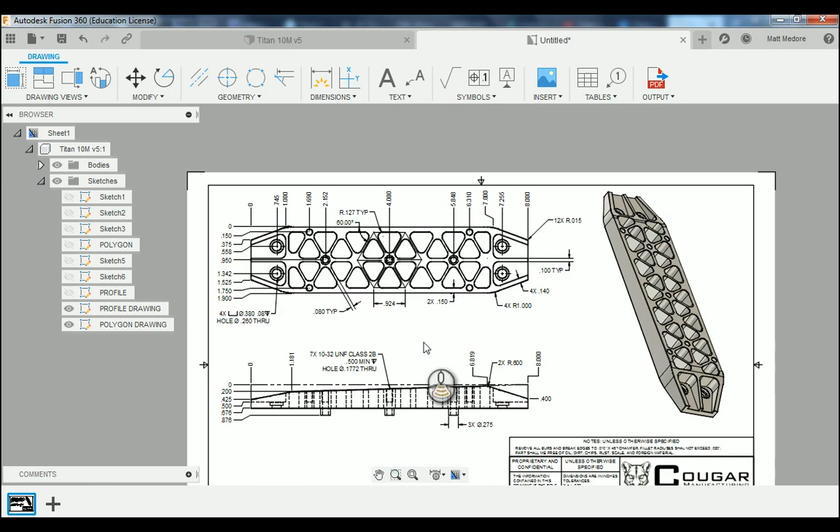This is a good time to kind of observe your drawing, double check, make sure everything looks good. The purpose of a drawing is so you can hand it off to somebody so they can actually make it. You want to make sure that all your measurements are clear and understandable for anybody.

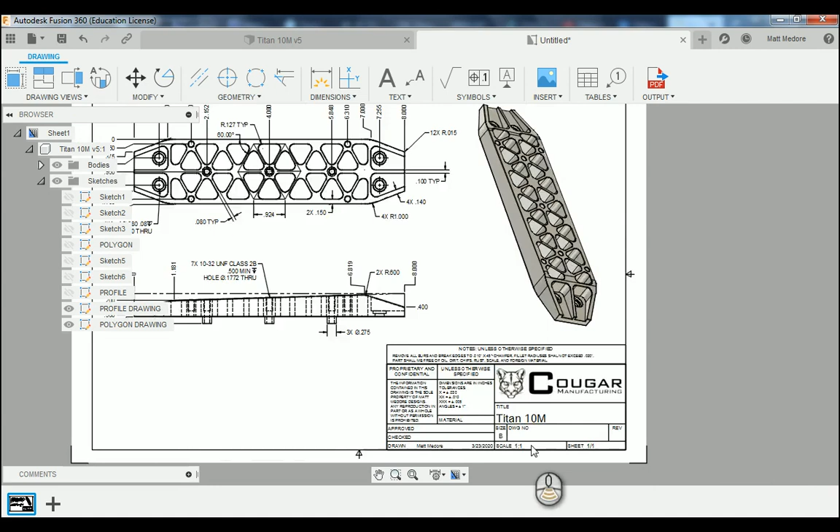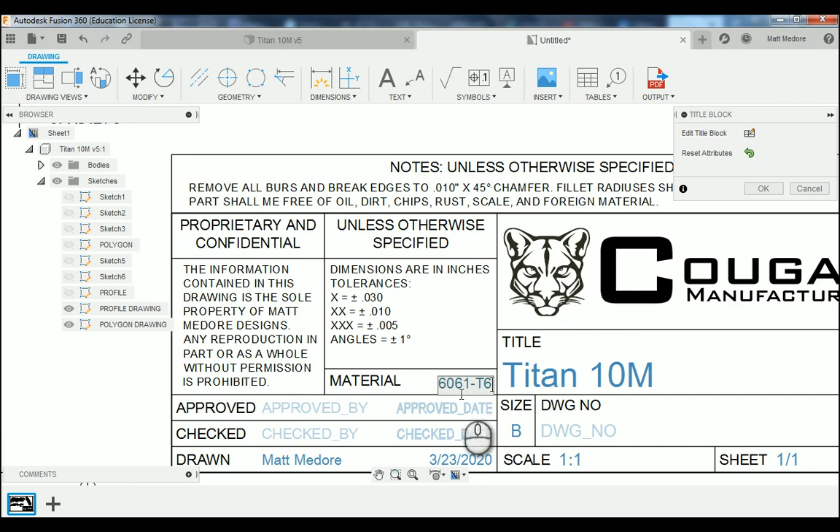Before we finish this tutorial, we're going to jump down to our title block and update it. We're going to double click on the frame of our title block and go down to material. The material this is supposed to be made out of is 6061 T6 aluminum. And this will be revision A for our drawing. And then press OK.

Other than that, this drawing looks pretty well defined. And this concludes our tutorial on how to create a drawing in Fusion 360.